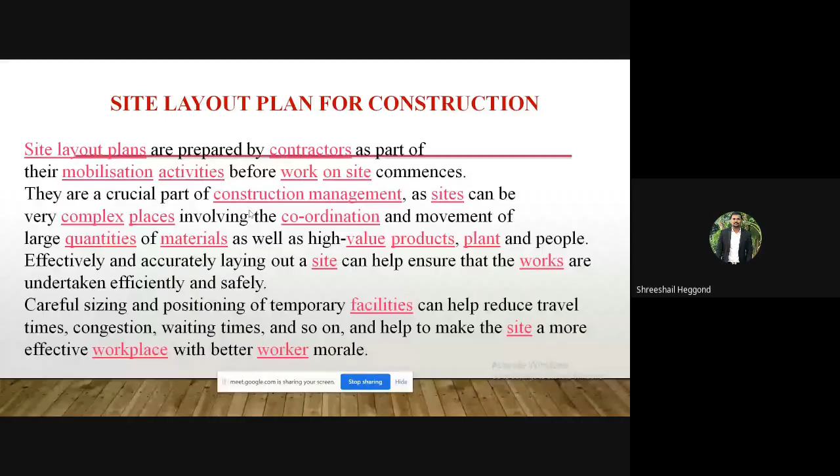Next, site layout planning involves 4 basic components. Those basic components are: first, identifying the site facilities that will be designed or required for the project. What site facilities are required? Those have to be identified for the execution of your project.

Second is determining the size of the facilities required, and other constraints of those facilities. Somebody is asking for staying arrangements - how many people are staying? What is the size? How much staying arrangement has to be done?

If you are making staying arrangements, what are the constraints for that? Whether the availability of water supply, electricity, and food is available nearby or not - what are the constraints involved with that? That should be determined by the project manager involved in the execution of the project.

Once you determine the constraints, then you establish the interrelationship between facilities. Whatever facility you are providing has to be interrelated so that you get better facility in the execution side, and it is done exactly right.

Optimizing the layout of the facility on site - sometimes it happens like travel availability. Your college or work site initial time was 8 o'clock, but buses are not available for the workers to reach. Then you may extend the site timing also, so that you make optimum use of whatever facility is available, and you can extend the next half an hour of intake flow time, and get maximum output from that.

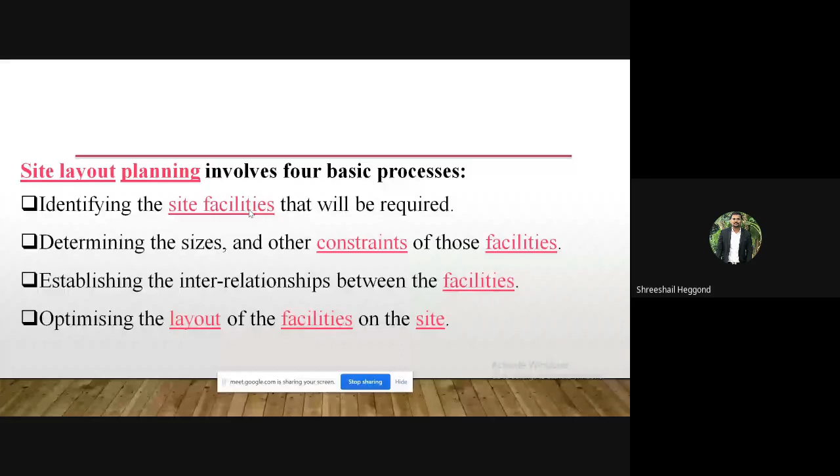Next is the site layout plan, which might include the location and size of the project. All the components need to be involved in the site layout plan, including zones for particular activities categorized by zone varieties, such as zone 1 to 3, or zone A, B, C, D. Likewise, the category of activities will be done accordingly.

Cranes, including radii and capacities. Cranes are nothing but what components can be prepared, what can be shifted from other places, what is the capacity of the facilities involved in the site that has been formed, and what size of crane is needed.

Next, site office. If you are dealing with a big project, the site office should be prepared so that the people who are higher authority, when they come to the site, have a center or office to work from. The movement of people will not be much. They can stay and work on the site for long days as well as for longer durations.

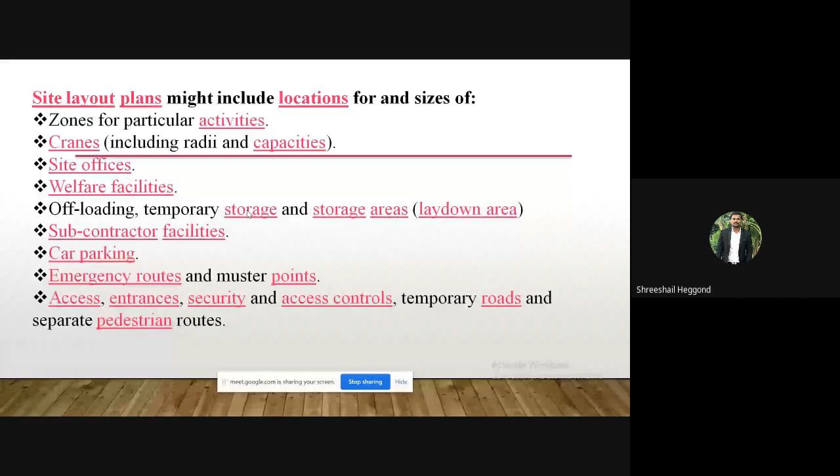In addition to this, vehicle wheel washing facility. Sometimes vehicles may get stuck in mud or on a sandy road in between. In such cases, the vehicle washing facility should be there so that the vehicles will not be dirty for the engineers, project managers, owners, or stakeholders who will be visiting the site.

Waste management and recycling areas are needed where some materials from the execution site, like concrete or other waste material, are completely wasted but can be recycled and reused for execution.

Site hoardings mark dangerous places, like where there's a curve in the road. Such hoardings should be mentioned in the site location so that people using that area will be careful.

Existing boundaries should be drawn showing where people should or should not move.

Protection for trees follows natural law conditions - whether trees should or may not be removed from the site, following nature protection law guidelines. If protection is required, it must be given to particular trees. Existing buildings - how many existing buildings are there.

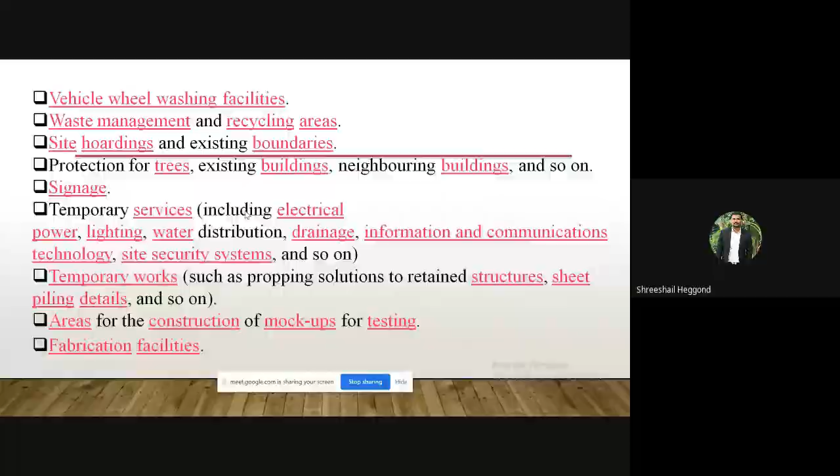Neighboring buildings and other already existing components need to be accounted for in how you make your site available for execution.

Signage on site indicates where the red color signal should be given, where dangerous areas exist, where movement should be minimum - yellow zone, red zone, green zone, as defined previously.

Such zone cases are not defined now, but in the site it has to be mentioned that signals and hoardings should be there, with naming in each place, so that people using the site, including unknown visitors, will be aware of what is in each particular area.

Next, temporary services include electric supply, power, lighting, water distribution, drainage, information and communication technology, site security system, and so on - these are temporary services to be provided for site execution.

Electricity supply is needed on site to use equipment like drilling machines. If people are working at night, power supply and lighting conditions should be there. Water distribution is needed for watering the structure from bottom to top, with pipelines for distribution and drainage.

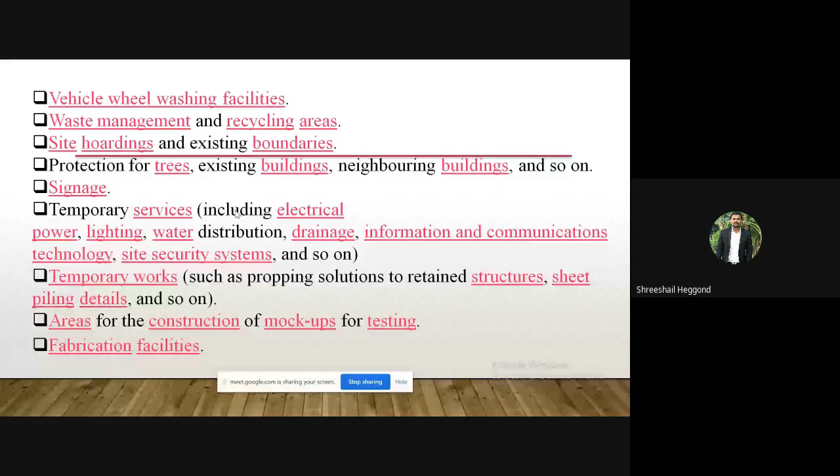This all gives the site layout of the structure. Next, problems caused by poor site layout plan - what will happen if you are not following the proper site layout plan?

Inappropriate storage can result in damage to products and materials. If you have not planned for proper storage - storage of cement or storage of components and materials not properly done - there will be damages to the products and materials.

Many examples you might have seen for improper planning of the structures are improper storage areas. If you are not providing on the site, random rain may come, or the wind or weather changes can affect your cement, and that would be damaged. Therefore, it is necessary to have proper storage areas so that the materials or products will not be damaged.

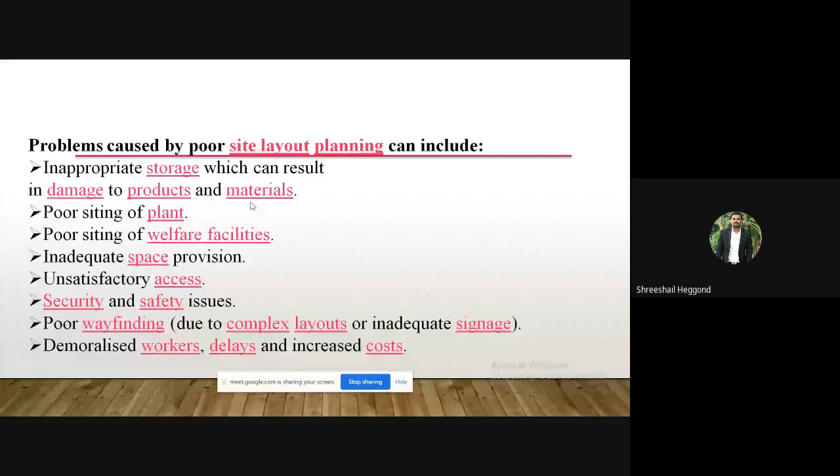As sites change in nature during the course of the work, there may be a number of different site layouts for different phases, and more detailed plans showing particularly complex areas or sequences or describing specific functions. A site will not have the same layout as time runs - there may be changes in nature, working culture, or workers. Depending on time and availability of resources, the site layouts may change. For that, you should have different pages of the site layout so that if anything changes as per the nature, you can change the site layout too.

Especially when complex areas are involved, or sequences of projects are there in series, you should be able to describe all the specific functions involved and how they should be attained through proper site layout.

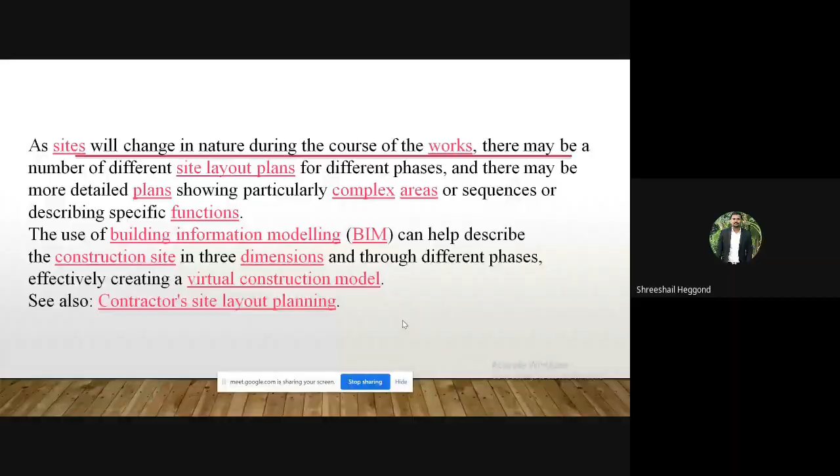These components all need proper site layout - storage areas, parking areas, facilities for higher authorities and lower authorities, all considered for proper site layout. Making everything available for a proper plan at the proper time is site layout.

How will the site layout design be done? There are three important components where the site layout design will be prepared.

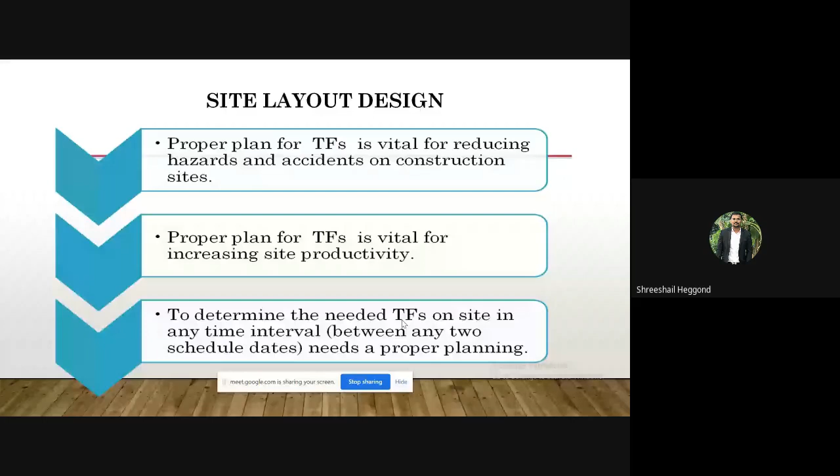As we have covered all the previous points, the design component will be much easier.

All the facilities which you are providing in the site layout design have activities requirements, and facilities are defined similar to the requirement of labor, equipment, and other site specific resources and equipment, which then fulfill the site layout design.

Temporary plans - the service for each temporary facility, the term facilities, are then determined from the schedule. Service time is the time the facility starts, that is FST, then the finish time is FFT - facility start time and facility finish time.

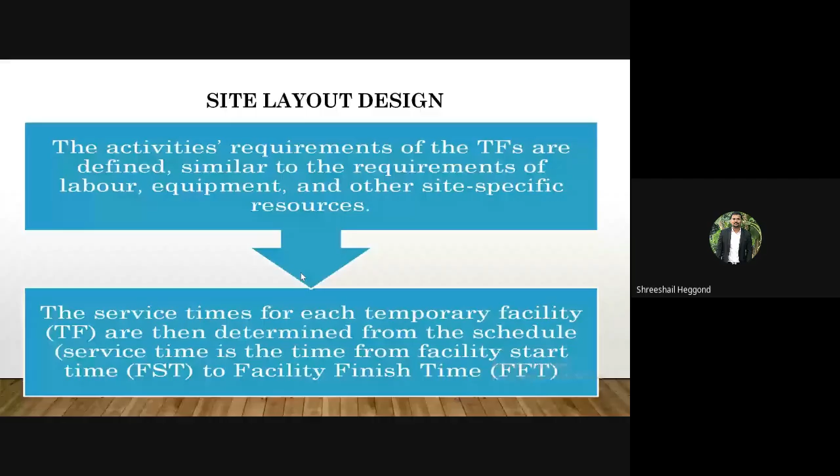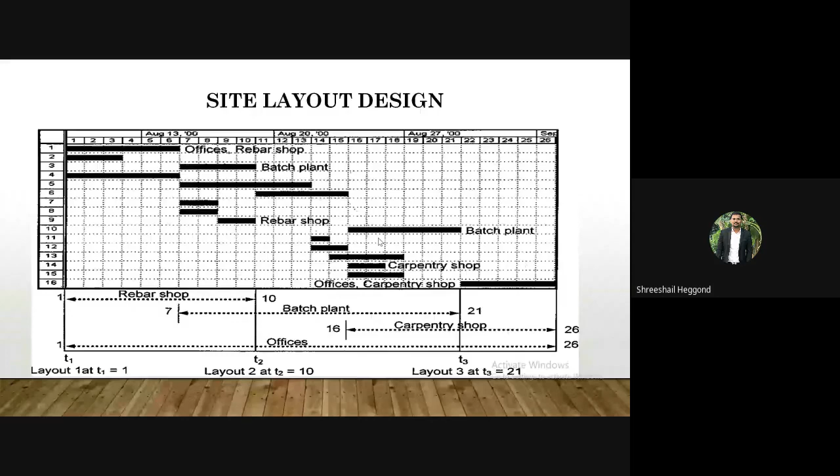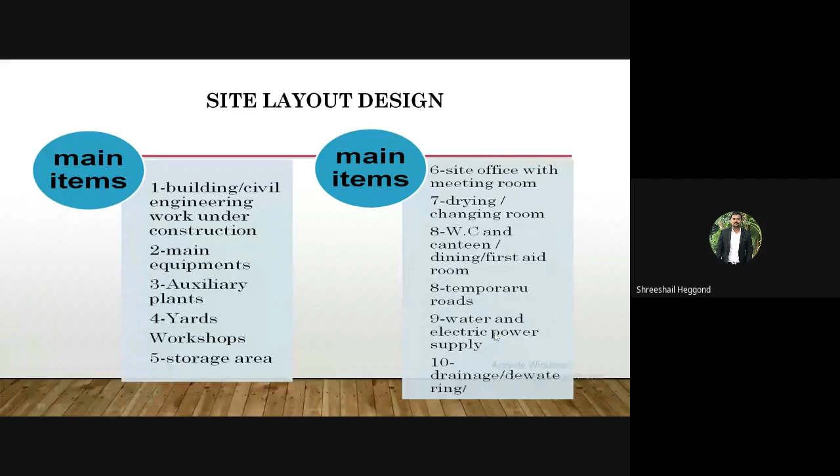Next, civil engineering work under construction. Main equipment involvement, auxiliary plants which has to be used for particular times, places for activities, storage areas, site office with meeting room, drying/changing room, WC and canteen, dining, first aid rooms, temporary roads, water and electricity power supply, drainage - all of this has to be kept in mind while the site layout is designed.

Specifically, the site layout will be divided into two zones. Initially, we talked about the zones of the site. We generally divide it into two separate zones - that is the central zone and inner zone.

First one is central zone. The main buildings works for civil engineering work under construction will be considered in this zone. Some of the main equipment like tower crane, lifting, boring equipment, all will come under the central zone.

Inner zone is considering carefully the location for loading and unloading, short-term storages for bricks, blocks, prefabricated elements, roof structures, including temporary roads - will come under the inner zone, which will be temporary locations, not the central zone, which will have the temporary accommodation for particular durations.

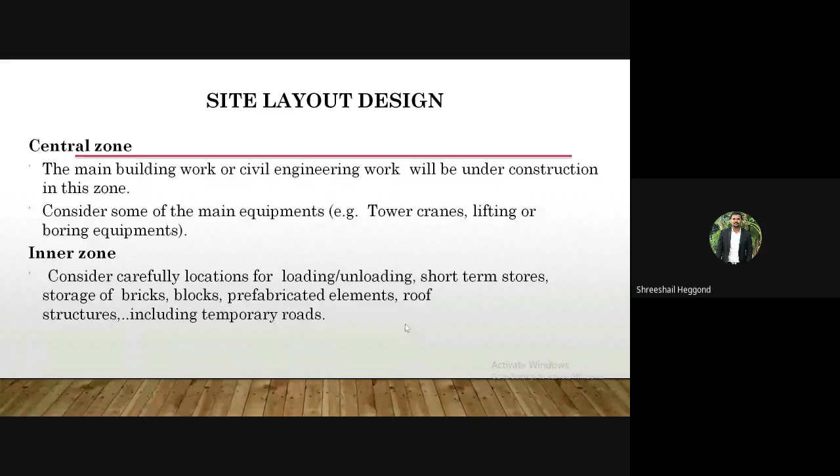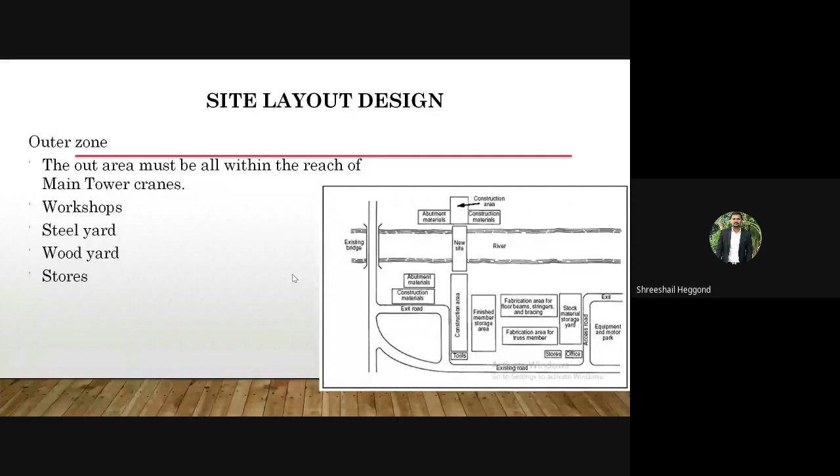Likewise, the material storage should be done - like workshops, steel yard, wood yard, the storage places - that has to be in line with where the main crane can take up the material and shift it to the next zone.

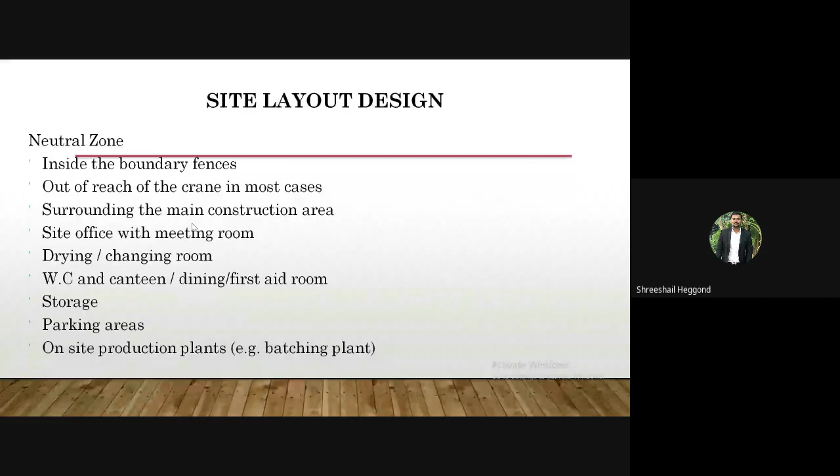That is of the neutral zone - what all the components should be there in the site layout. For the neutral zone, inside the boundary fences, out of reach of the crane in most cases, surrounding the main area: site office with the meeting room, drying, changing rooms, WC, canteen, storage, parking, on-site production plants. These are the extra components or facilities that has to be provided for the site. These are the extra active storage areas, the extra places where the expenditure will be there, but that has to be naturally done in the site layout.

And how it works - the site layout depends on type of project, duration of project, weather conditions, location, and complexity. This component will rotate and your project will be done under this type of areas.

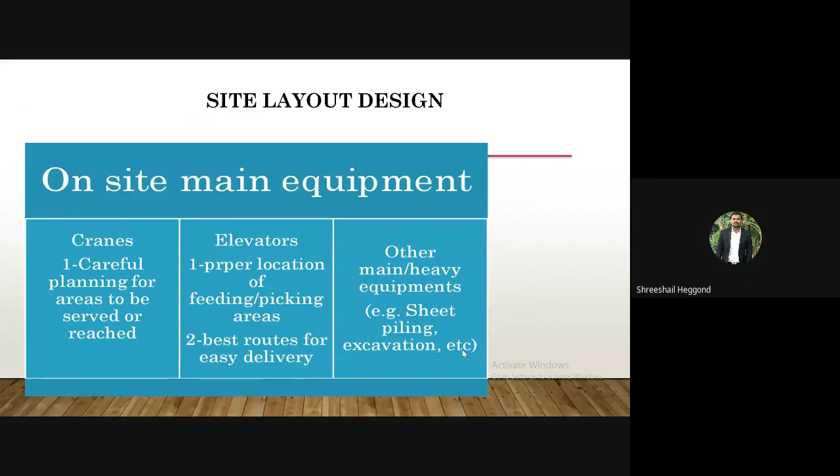On-site main equipment should be cranes - that is careful planning for area to be served or reached - then elevator, proper location of feeding, picking areas, best routes for easy delivery, that is elevator job. Other main heavy equipment like sheet piling, excavation, etc. will be part of our site layout main equipment areas.

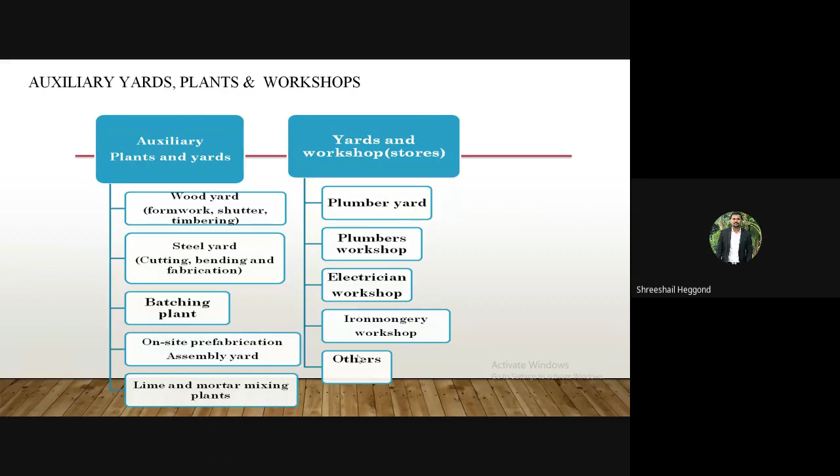Which will complete your complete site layout plan, mobilization work. Next we will be dealing with some other component with respect to the site, and then we will be dealing with the third module.